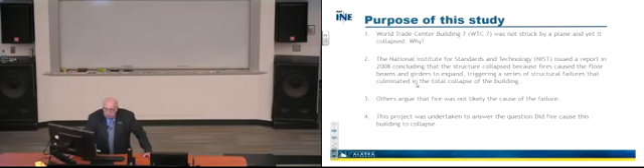More importantly, I want to let you know that since this is a progress report, it's not a traditional slideshow with just bullet points. There's quite a bit of prose here, and the idea is that this will go out and be available for you to read additional information if you would choose to do that. We're going to be transparent. We welcome any questions. We're making everything we've done available, and we want to make sure that everything we've done is scientifically tested. So we'll have a peer review committee to make sure we've met all those standards.

Now the methodology. We assembled first the available documents, construction drawings, etc., that were available for this project, for this building. Traditionally, I would have liked to go in and pick up all the pieces of the puzzle and put it back together like you would a typical airplane, but they did not exist, it wasn't available. So we did the best we could with all the available documents, and basically we created an AutoCAD drawing that we used to create a virtual geometry of this 47-story building. In digital form, you should be able to see every piece, every puzzle, every member, and it should look exactly like what was used in that structure. That's what we did.

We then prepared an ABAQUS nonlinear computer model for the connections and for the framing of this building. That's a fairly sophisticated finite element program available that enables you to look in detail at how something is going to respond under a set of conditions. I know I have a mixed audience here, so I'll try to keep it as simple as I can, while also sharing some pieces of complexity so those in the technical arena appreciate that we looked at this in a fairly sophisticated way. There's several things here I haven't talked about - we have SAP 2000, the current edition, version 18, and ABAQUS, and we used those to look at the framing.

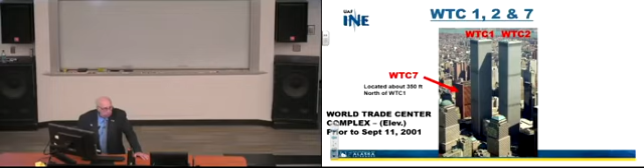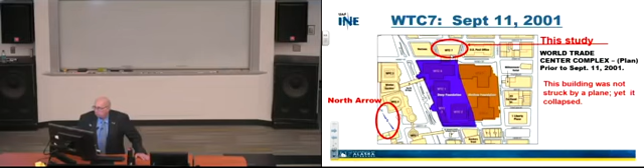Within that context, here's floor 13, because we're going to spend a lot of time there, so you'll understand what's going on in that area. Here are these perimeter trusses I was telling you about, at floor 5, 7, 24, and 22. Those trusses are resisting lateral loads. And in the plan view, you see A, C, D, and so forth.

There's that building in plan view, and here's what we're looking at. Down below is the Con Edison substation, shipping, and so forth — all the things going on down there. That's what it's built on, that's what it looks like, that's what we're dealing with — way more complex than that. That's the perimeter view; that's not what it looks like in the internal view.

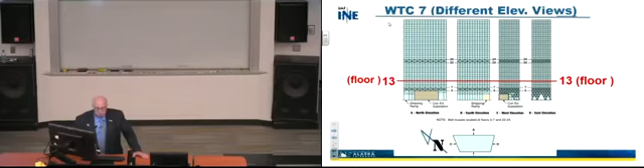Because column 79, just to give you a snapshot of where we're heading — column 79 is basically what they said failed to bring this building down. So we're going to go there and take a look at it, and we're going to look at it intensively.

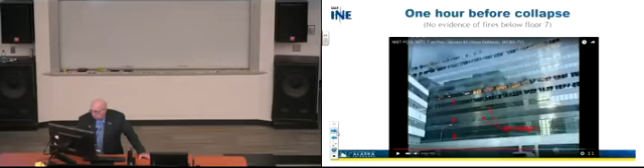The beams didn't get that hot. When we take a look at the beams, they reach 500 degrees C, and the column temperatures only reach 300 degrees C. Now that's significant, because there's a point in time, and I'll show you in a moment, whereby the steel begins to decrease in strength and modulus when it reaches a certain elevated temperature. So the first thing I would have thought when I got involved here is, okay, the columns obviously got really, really hot, lost strength, and we would have ended up losing the building.

Where's that at? Just to give you a heads up on what I'm talking about, that's along this line. Okay? Those are the lines of these beams right here. You see these beams? They're going into these girders. They're framing in. Am I making myself clear? So in plan view, I've got a beam going from this outer edge to that girder. And those are beams. And those are the numbers, 3004 and so forth, that we're talking about. Okay?

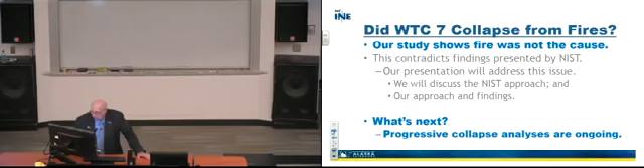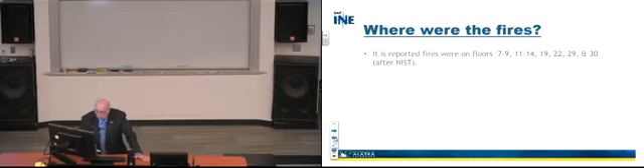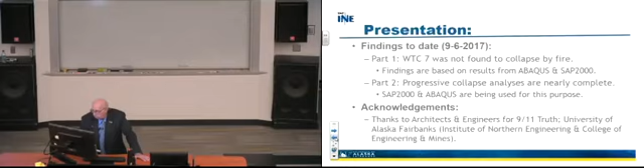The bolts fastening girder A2001 to its seat at column 44 and 79 were broken. That's significant. So let's go back here. Here's 44 and there's 79. And they're saying the connection of this girder to those columns, the seat connection, did not function during that period and therefore lost lateral support and produced a problem. Okay?

Going backwards here or something. Hang on a second. I'm going crazy. Too much fun. All right.

So they've lost those supports. So that means those two columns no longer have lateral support at that level, and did they possibly have a problem later? The floor loading was 88 pounds per square foot. The NIST computer model results were based on exterior columns being fixed in every direction. That's kind of a significant thought.

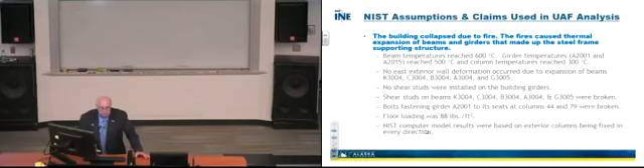All right, so now, looking at their plans, this came out of the NIST report on page 343, 2008. And so this gives you a geometry of, that's a 45-foot length from 44 to 79. 45 foot, that's a girder length. That's longer than this, for sure. You see what I'm saying? That's not small. This is a huge building, 600 feet across. I mean, for God's sake.

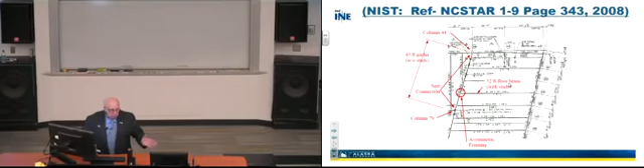So here is 50-some feet here, 54 feet across. This is our exterior wall. I'm in the northeast corner of this building. Is that clear to everybody? Here we are in that trapezoid world. Notice that there's asymmetric framing. These beams, those beams, for God's sake, are 52 feet long. That's not small. I mean, where in the world do you see that kind of stuff?

So anyway, in their view, by taking a heat model, putting fire on it and then subjecting their finite element model to an increase in temperature, they got a thermal expansion. Their thermal expansion looks like this. So that actually is this girder right here, A2001. And it expanded, and they said it pushed off of this bearing seat, and thereby they lost support. And then these cascaded downward, okay?

So that's basically what we're talking about here. There's that girder I'm talking about. There's that exterior. And here are lateral supports for this beam system through here. So what were their conclusions? First of all, fire-induced weakening of critical columns did not cause WTC7 to collapse. Okay, didn't get hot enough. They're saying that 300 degrees is not hot enough.

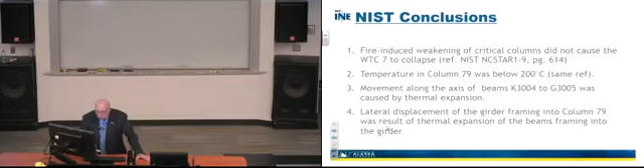No argument. Temperature in column 79 was below 200 degrees C. I think that's true. I might have to look that up as a reference again, but I'm pretty sure that's about what it was. Movement along the axes of beams K3004 to G3005 was caused by thermal expansion. Then the lateral displacement of the girder framing into column 79 was a result of thermal expansion of the beams framing into the girder.

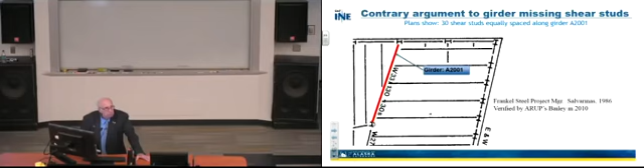All we're saying here is when these heated up, they got longer. This was fixed, so they're all going to move to the left. That means they move what direction? West. And in moving so far west, what happens? Well, they're going to try to move, and is there enough space to hold them in place? That's what their argument is, right? That's key right there. And that's what it looked like. Bang, bang, bang, bang, right? This thing bowed outward. And so this moved and that moved.

Okay. This is the cascade issue that they said. Okay, so the buckling initiated here at this place right here, at floor 9. And then all these issues means that they lost lateral support of that column. This is column 79, by the way, the one we've been focusing on. That column 79 doesn't have any lateral support, and because of that length, it cannot take nearly as much load as it was designed for.

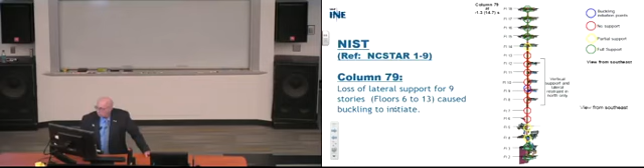And so consequently, the vertical support and lateral restraint in the north only, and so therefore there's a huge problem. And then there's full lateral support up here, and then there's partial lateral support down below. That's down here at the very bottom in the kind of Con Edison area. Those are all laterally supported. But between this zone, they said, went away. So the loss of lateral support for 9 stories, floors 6 to 13, caused buckling to initiate, which means you lost it. Okay? Is that clear? Everybody clear about what I'm saying here?

Okay. Now let's take a look at their model for a moment. Their model is looking at a partial of that trapezoid. Down here, partial. This is the northeast corner. There's column 79. And that blue is kind of significant. That blue is where, at every place a beam and a girder come together, a column to girder, a beam to all these kind of things, there's a connection that's on the drawings that says, here's how you will build it. You bolt it together, you make it do whatever you want it to do, and that's the way it was supposed to be built.

Remember that the north arrow is here, this is the west side, the east side is to my right, and this is after NIST, the area of floor where connections were modeled on floors 8 to 14, and that's in the blue area. Over here, that wasn't done. So, there's column 79, here's the area outside, and so now let's take a look. Outside the selected area, connection failures were not modeled. NIST used fixed or pin connections.

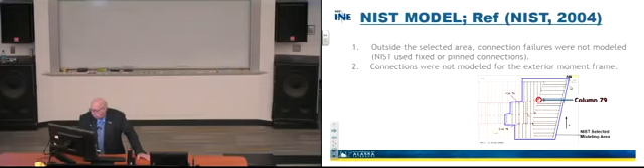So automatically, you have to ask yourself the question, do they have the same stiffness as what you were modeling here more accurately? And so the next corresponding question is, does it have an influence? Does it change how the system is going to respond? And so the connections were not modeled for the exterior frame, and the columns themselves were treated as fixed.

So also in the NIST documentation, page 525, 2008, a girder was considered to have lost vertical support when its web was no longer supported by the bearing seat. That means if there's loss of bearing support on A2001 coming into column 79, then it's lost. The bearing seat at column 79 was 11 inches wide. Thus, when the girder end at column 79 had been pushed laterally at least 5.5 inches, the web was no longer supported by that bearing seat.

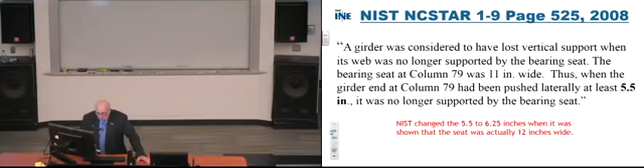NIST changed that 5.5 inches to 6.25 inches when it was shown that the seat was actually 12 inches wide. So that's something to think about. Why did that happen? And that was later. So some of the NIST results are the following. And pardon me, I hope I'm not boring you, but this is a passion for me. But here, let's take a look at what actually happened.

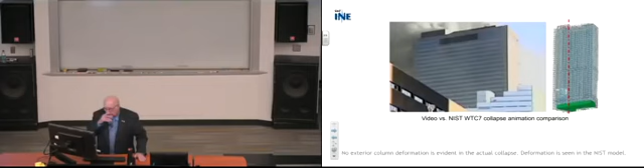Here's the NIST model. And remember those connections. Okay, so we're looking at this not from the south, we're looking at it from the north, right? Isn't that right, Zilly? Or am I looking from the south? Yeah, that's the north face of the building. Yeah, exactly. North face of the building. So here's a penthouse up here, and you're going to see two different situations here because of the connections issue. Now let's see, and this is the real building.

So here's their model. This is their progressive collapse, and I'm not going to show you ours yet. And here is this one, okay? And here is taking a look at the failure that actually did occur that day.

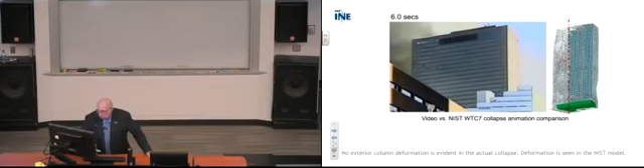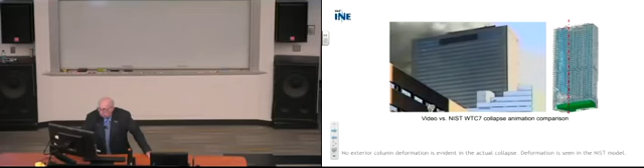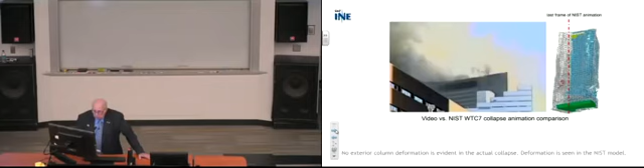So one has to ask themselves, is that the same thing? Is that the same building? So it looks like it behaves in an interesting sort of way. Okay, so anyway, let's go on.

Here's the NIST model that we were just looking at. And so this is the other side, you see, flipped, that I'm showing you where that modeling was actually done. This is column 76, 78. And 79 is in here. And so they were looking at this finite element progressive model that they were using to look at that.

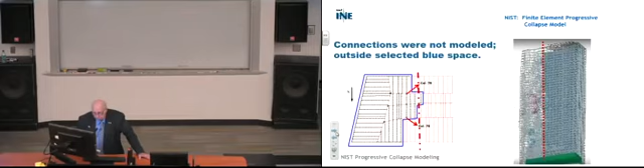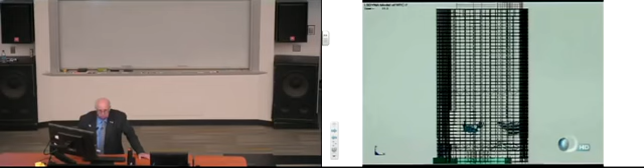Oh, I suppose we could even look at it from a different perspective. And there it is again. This is what they're doing. You have to ask yourself the question, though, why is it so much different on one side than the other? You see what I'm saying? And here's things that, because of some damage that came in from the debris falling through the windows and stuff, they're accounting for some of that stuff.

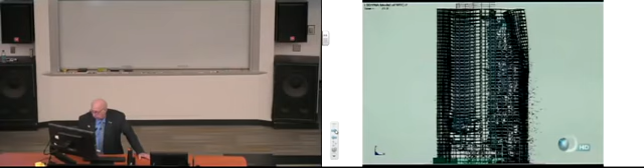Anyway. All right, so let's talk about UAF for a moment. Analysis of the NIST collapse initiation, hypothesis and propagation claims is really what we're about to embark upon: how valid is some of this stuff from a science point of view.

So in the UAF analysis of the NIST collapse initiation, hypothesis and propagation, we created a solid model, in Abaqus, of the structural members in the northeast corner of the 13th floor of WTC 7, and a finite element analysis was then performed to replicate the results claimed in the NIST WTC 7 report that girder A2001 was pushed or rocked off its seats at columns 44 and 79 to initiate the collapse of the building. So one might argue that if those things didn't happen, would the building have collapsed?

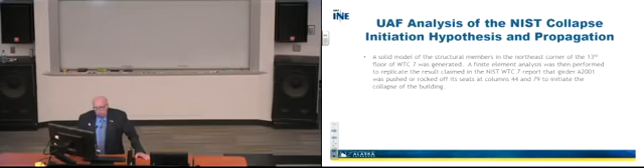So, okay, so here we go. This is the area I'm dealing with, right in here. There's column 79, there's that girder, A2001, there's 44 and 79. And the question then becomes, how does it behave?

So what we're going to do is we're going to create part of a finite element model, and we're going to be really conservative. We're going to force things to happen that's worse than the real world, okay? And in so doing, if we can't force failure, then it couldn't have happened. Are you with me on this point? All right, so that being said, we're going to fix the ends.

We're going to force movement through girder A2001 by heating it up. This over here is going to be heated up. These beams are going to get heated up, and they're going to be fixed in the other direction. So we're pushing it each direction, making matters really, really the worst possible.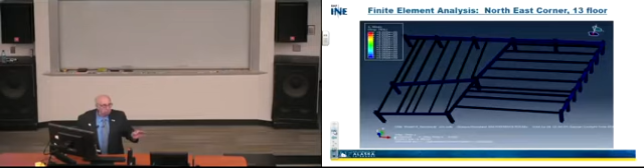Okay? We did that. And so this is the beginning. You'll notice everything's zero. The stresses are all zero. We haven't put the temperature on it yet. Okay? This is the column that we're talking about, column 79. This is real significant, by the way, because column 79, if you look at it, do you know what I'm talking about when I say a W shape? A W shape looks like an H. And that's what we're looking at right here. That's what that column was made out of.

It's a W14 by 730 standard structural shape. What that means is it's 14 inches deep, weighs 730 pounds a lineal foot. That's a chunk of change. Now within that context, though, what they did is they built side plates on it. And they closed that box. They closed it so it has structural integrity, so resisting twist, significant.

But those edges, those 2 inches by 26 inches buildup, means that there is a lip on each side of this, and they're going to literally put on that flange the bearing plate. Okay, are you following me? That column stays vertical, but we're going to put a bearing plate in here. Okay, so there's what it starts to look like. We're looking at it right now.

Plan view, A2001, going over to 44, and there's a connection to column 79. And see that lip right here? Those lips? Okay, got it? Understand? So if this thing starts moving, and it's getting shoved, and if it's getting shoved to the west, which is to my left, it's probably your left too, then it can't get past that thing, unless something happens or breaks, right? Does that make sense?

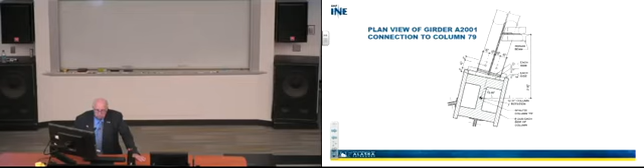And there it gets shoved. So the plan view of A2001 moving across its bearing seat at column 79 due to thermal expansion of the beams framing into the girder from the east is here, and it gets shoved. Note that picture illustrates that A2001 is trapped by that column side plate, and it's not possible for it to move the girder web beyond the seat claimed by NIST.

They're saying it got shoved off and fell down. The fact of the matter is they didn't have the side plates on it. They weren't there in their model. So they wouldn't have found that. But yet they did exist in the structure, in reality. It appears that NIST did not examine the side plate influence on the restriction of movement by that girder.

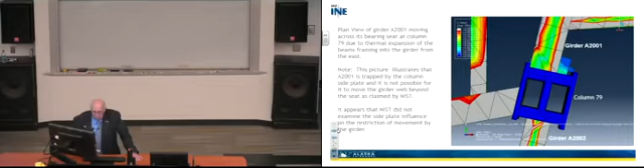Okay, so now let's take a look at what else we looked at. And this is just part of the puzzle, because we've been playing this game for 2 years. So this is just a few weeks of stuff. So the model shows the influence of the thermal expansion at the northeast corner of floor 13. Here we are. There's column 79, column 44, and there's the northeast corner. And here are the beams framing in to that girder system.

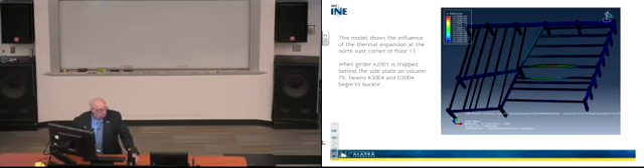So when girder A2001 is trapped behind the side plate on column 79, these beams begin to buckle. In other words, they can't go anywhere. So it's heating up, it's pushing, and they can't stand the amount of load axially that's been imposed upon them. And so they begin to try to displace out of the way and relieve their states of stress. Are you following what I'm saying here?

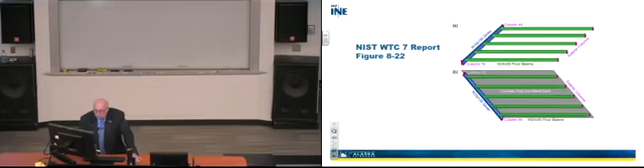So fundamentally, that happens. So this is out of the NIST WTC 7 report, figure 8-22, which is showing basically concrete slab, metal deck, all that kind of stuff. Exterior columns out here, and this is basically column 79, column 44, and how that column is, and the girder here, and so forth, okay? And here's what begins to happen on the exterior columns according to their stuff, okay? And so they did not have those side plates in there.

So let's treat for a moment the lateral support beams, S3007, and so here we are in this area right here. See those little beams in here? They play a role, and that means that they provide lateral support for that beam, also for that exterior. So they're forcing them to act together, not individually. So if things actually got out of hand, you have a lot more capability from a lateral torsional buckling point of view or an axial load point of view.

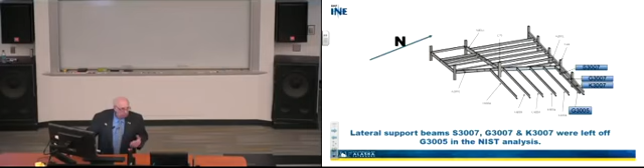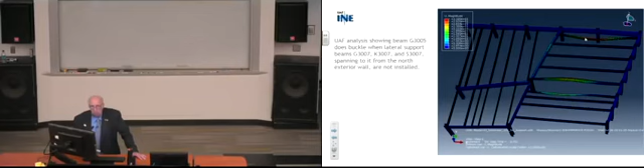And so the lateral supports were left off in G3005, okay, of this beam. Those were left off. Yet they're there. So that means that something could happen, and there it is. So UAF analysis showing beam G3005 does buckle when lateral support beams 3007 spanning to it from the north exterior wall are not installed. Okay? So if those are not installed, it's going to buckle. So the UAF analysis also shows that that girder does not buckle when you have them in.

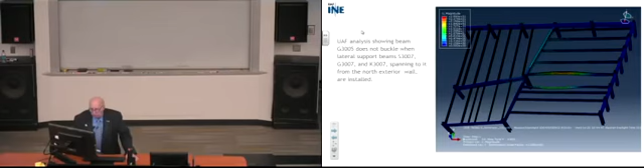There's a huge difference between those two thoughts and what that might mean to the behavior of this system, spanning to it from the north exterior wall as we see here, okay? So as everybody is getting a mental picture of this building, you should be almost getting an intimate view of what we've been living with in this picture, okay? Let's take a moment, take a breath of air.

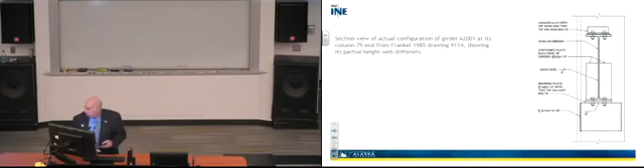Section view of actual configuration of girder A2001 at column 79 from the Frankel 1985 drawing 9114 showing there's partial height stiffeners in here. Now, folks, let me just absolutely tell you, this is critical. Those stiffeners prevent this web from buckling. But more than that, it prevents these flanges from getting overstressed and flexurally having a problem. If they're there. But NIST did not include them.

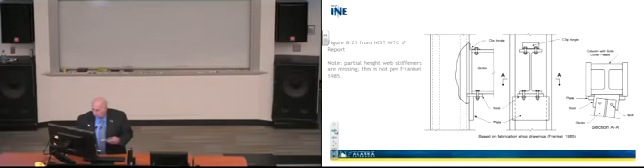So, partial height webs are missing. That means there's some issues here that literally affect the behavior of this system. So figure 8-23, finite element analysis from the NIST WTC 7 report, note partial web stiffeners are missing. So the behavior of this interaction between column 79, A2001, column 44, the beams to the girder, the moving of the girder on that bearing stiffener, I mean on the base plate.

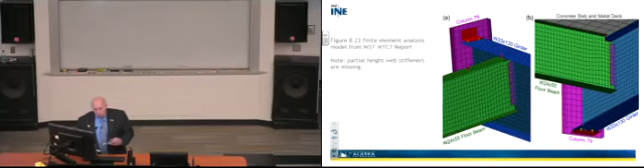Now remember, they didn't have the base. They didn't have the side plates. They didn't have the stiffeners, and all of those things are going to give you a huge added resistance to anything going on here. And in spite of the fact, I'm going to share with you some other things that make it quite interesting. So here we go. There's what if you don't have any side plates.

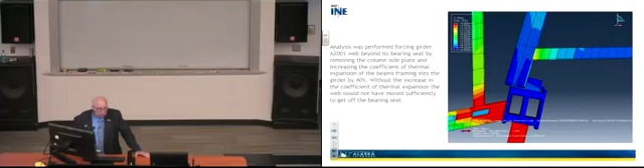So the analysis was performed forcing girder A2001 beyond its bearing seat by removing the column side plate, increasing the coefficient of thermal expansion of the beams framing into it by 40%, so we could get that kind of movement. That's not true; we did it just to see what could happen. Without the increase in the coefficient of thermal expansion, the web would not have moved sufficiently to get it off the bearing seat. We wanted to see if we could make it move. Okay? That's what we did. That's at column 79. That's A2001. Is that clear? Everybody got a mental picture of what's happening?

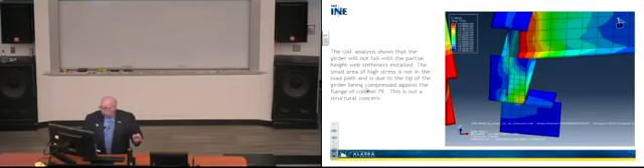Well, again, the UAF analysis shows that the girder will not fail with the partial height web stiffeners installed. That small area of high stress, right here, right there, is not in the load path. That's a point of high stress, by the way. It is not in the load path, and it's due to the tip of the girder being compressed against the flange of column 79. This is not a structural concern. It's a fact that there was some overstress there. It's not going to cause the building to come down.

So we also conducted a modal analysis showing the 52 Hz frequency mode of the falling beam and girder assembly, which was needed to calculate the combined stiffness of the contacting structural members and the subsequent impact load on the girder below the 12th floor. So here we are on the 13th. It falls, drops off of that base plate, drops down, beams go, girders go, concrete goes, all that stuff happens. You're going to have stiffness involved. You're going to have F equals MA involved. You're going to have those conditions, and so we looked at that.

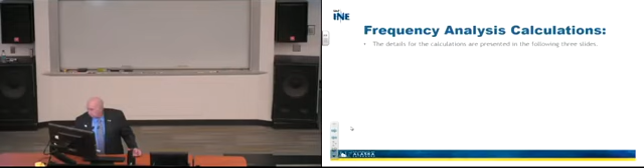The NIST and Arup claimed that the falling beam and girder assembly from floor 13 impacted and broke through floor 12 in an 8-floor cascade. Okay, so based on the natural frequency, the stiffness of the beams can be calculated and the amount of deflection under load can be examined. This establishes whether the phenomena could actually physically occur. I'm not going to spend any time on it, but those calculations are in the following pages, okay? So we did that to examine that issue, and that's where they are. At night while you're relaxing, you can read these. But I'm not going to read them for you.

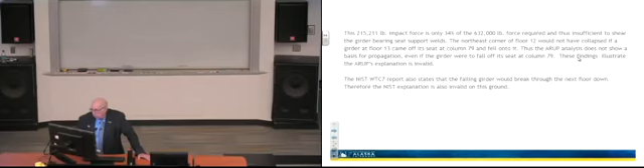So anyway, this 215,211 pound impact force is only 34% of the 632,000 force required, and thus insufficient to shear the girder bearing seat welds, and the northeast corner floor 12 would not have collapsed if a girder at floor 13 came off its seat. That's basically what we're saying. Thus, the ARUP analysis did not show a basis for propagation, even if the girder were to fall off its seat at column 79. These findings illustrate the ARUP's explanation is actually invalid. That's another group, by the way. So there's more than one group involved. Weidlinger Associates' report information is going to be presented following this, and so here that is, if you want to read it.

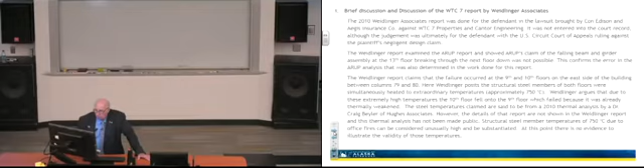And I originally had a change to this, and it looks like that change didn't get made, but I broke this out. So anyway, let's talk now about our approach, which is looking at things from a different perspective. There was a 5.5-inch movement at the girder bearing support at column 79 according to NIST. The issue that led to that 5.5-inch movement was non-composite main girders. Now, what do I mean by that? You have concrete floor slabs, and you have to decide how you're going to build it. Are you going to build it with shear connectors to the flanges and make it act as a system, or are you going to leave them so that they can slide? So I looked at it both ways. I said, okay, what if it slides? What if it's so lubricated between those flanges and that concrete, there's no resistance to movement?

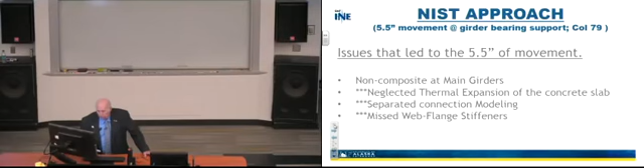What if there's friction between it? We looked at that. What if it's partially composite? What if it's totally composite? So for all those, we neglected thermal expansion of the concrete slab, separated the connection modeling, and missed web flange stiffeners were looked at. Okay, so all those issues are going on there.

So our approach was to take structural modeling and look at two programs, Abaqus and SAP 2000. We established a quality control program with two researchers, Zili and Fong, each doing the same thing much of the time and challenging each other, with me there as a referee to make sure what we got out of it was right. If we didn't agree, we had dialogue to find ways to figure out what's going on, what's wrong, until scientifically we could justify every step of the way. It takes longer, but it's valuable to make sure you have good stuff.

So in Abaqus, we developed nonlinear springs for structural connections. What does that mean? It means that if you have these members bolted together and things move, and it moves fairly significantly, then it's probably not a linear curve. It's probably not a straight line. It's probably going to deform non-linearly, and it may never come back the way it used to be. So we looked at a nonlinear response.

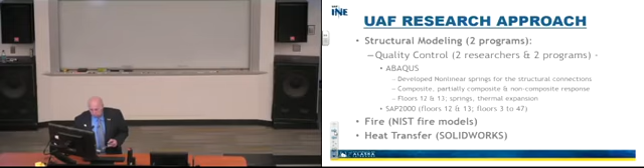We looked at composite, partial composite, and non-composite conditions. We looked at floors 12 and 13, and we looked at thermal expansion. In SAP 2000, we looked at floors 12 and 13 again, and floors 3 to 47. Here's what we did do though: we used the NIST fire models for this, and then we looked at heat transfer using SolidWorks, and we also used Abaqus to do that. The steel framing, connection columns, beams and girders were considered throughout the entire floor, not just part of it, by the way - all of it.

So nonlinear springs on all stories is something we haven't finished yet, but we've looked at it. Substructuring frames and concrete floors were used to minimize computer time. It's my understanding that some of these computer models were taking weeks to run. I went to a substructuring system where we could run them in less than an hour, maybe half an hour, maybe even less than that - I'm not sure. They ran really fast because I took out all the complexities and replaced them with equivalences. And then if we wanted to know what was going on within those equivalences, we put that stuff back in. So we could save huge amounts of computer time.

Heat transfer was studied, and we looked at the floor tile over the concrete with welded wire fabric, stay-in-place forms, and flutes. These were stay-in-place forms, and there's a flute - what does that mean? It means there's a steel... imagine if you take just a straight line and you drop it, a little square hole, you'd say, and it's long. And so that space is a place where they don't put any concrete. It's an open space - saves concrete, you still get strength, and that's the flute.

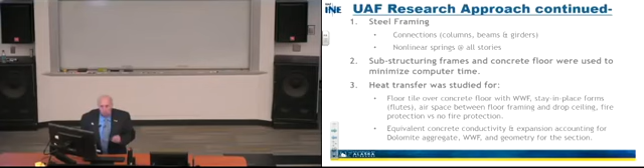We looked at equivalent concrete conductivity and expansion, accounting for dolomite aggregate, welded wire fabric, and the geometry of the section. What am I talking about there? Well, we went back to New York and asked what kind of aggregate they used when they built this. We tried to be sure we knew the aggregate, because it has a huge effect on the thermal conductivity and thermal expansion of the concrete. It's 75% of the product, so we needed to know what it was going to be. I had written a paper on this subject some years before and had a pretty good understanding of that.

So this again is the NIST seat connection at column 79 that they did, but they didn't consider those stiffeners. So here's the way we began to model the actual system, the way it went together. Here are those side plates - notice that they're there. Here's the girder coming in, and there are the partial height stiffeners. So therein lies - they actually were there - and we began to model this from a computer program into digital form, so we knew how this thing was going to behave when you put it together.

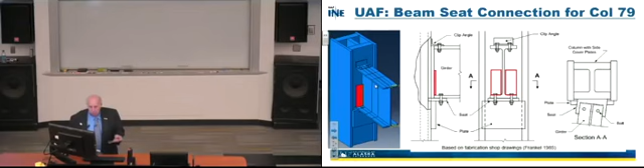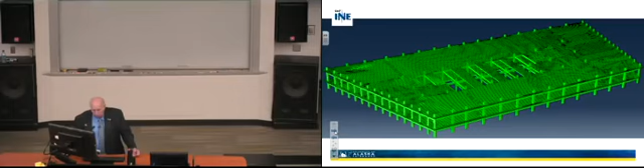Here's what that floor system actually looks like. By the way, these are elevator shafts. This over here is column 79, and there's column 44. There's the exterior of that floor, there's the whole system. That's an Abaqus model we're looking at.

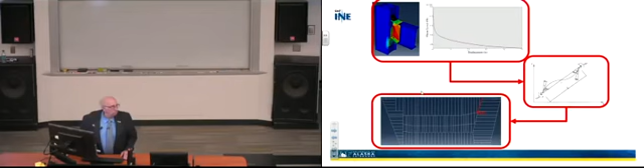UAF sample connection response. I'm taking every one of these connectors, and we identified this and called it an STC. That's our name, STC. What does it look like? It looks like this, that's the connection type. We plotted the shear load versus displacement on it, so we can always go in, put that spring wherever it's at, and get a response equivalent to if we had used all that complication anyway. So we threw it away, and replaced it with an equivalent to save time.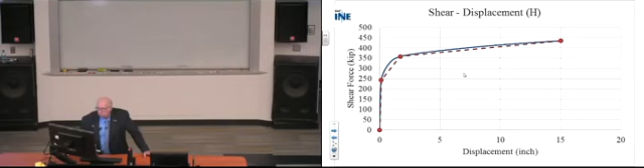Basically, we put a load, we plot its behavior, and from that we can then put the equivalent into it. So this is a simple model of floors 3 to 47 from SAP 2000, and that's what we're using to look at progressive collapses with.

Let's take a quick look at the materials that went into this thing, I won't bore you too much, just a little bit. Material properties: steel ASTM A572 had a yield of 50,000 psi. Thermal conductivity of the steel was 35 BTUs per hour per degree Fahrenheit. Here's the thermal strain value. Density was about 490 pounds per cubic foot. We also had some ASTM 36 steels in here, I'm just not showing you all of it.

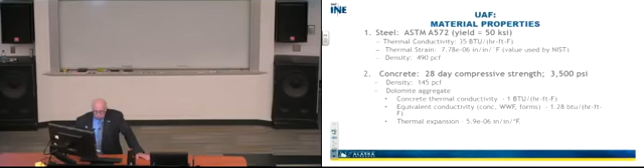Concrete's 28-day compressive strength was 3,500 psi. Density was about 145 pounds per cubic foot, dolomite aggregate. We got a thermal conductivity from it, and an equivalent conductivity we're going to be using here, and thermal expansion. So that's the kind of stuff that made up the model to simulate what we thought the building was going to be.

We took and fixed the exterior column wall line here, as did NIST, and we subjected it to that heat-up model, and we got a very similar result. Well, we didn't actually—we did. This is not, I'm sorry, I apologize, this is not the NIST model. This is our model. Here we have the connections as they truly are, all along this system, throughout this entire floor system, how it actually was built.

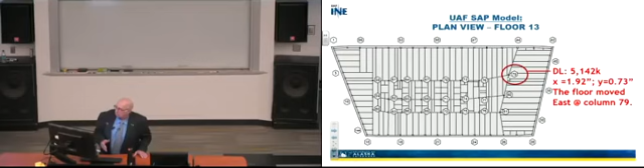Then we heat it up. By heating it up, we have a dead load here of about 5,142 kips. We have a movement of that section right there of almost 2 inches, but not west—it went east. Totally different. The floor moved east at column 79, not west. And by the way, they moved together, they didn't move separately.

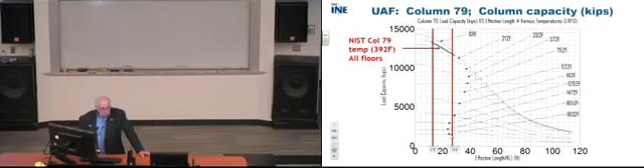So here's the material response versus temperature. Here's the column 79 capacity curve as a function of temperature. You can see even if you drop down into here, you don't get much change—column 79 at 392 degrees Fahrenheit. This is load capacity versus the effective length for these various temperatures. So this is 1832 degrees Fahrenheit. I think you can see it can make a huge difference, how much the capacity of that thing changes.

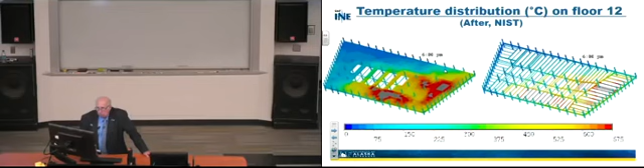Let's talk about the fires we actually put in this building, here's what they were on floor 12. There's that whole area at 6 p.m., and then there's the fire. That came from the NIST models, and we used them at this point. Same here on column 79, floor 12 and 13. UAF Abaqus structural expansive movements, just wanted to share with you. This is the model we're talking about, this is floor 13.

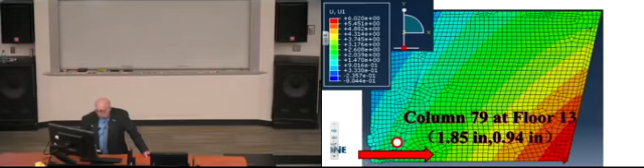This is column 79 at floor 13, 1.85 inches to the right. That means east, not west. So this whole thing moved. I'll show you a different picture here in a moment. So this is all this stuff to the east of this.

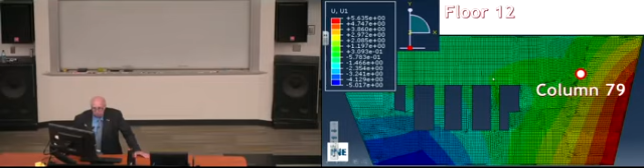You can begin to see the displacements if you start looking at minus 0.50 - where's the zero at? It's over here somewhere. Here's column 79, so it's moving with respect to this area over here. It's not moving with respect to this, it's not moving with respect to that. It's moving this way and that way with respect to what we call the thermal centroid, which is your stiffer point. So basically you've got a center of stiffness by which this thing is behaving. And that's what's happening here.

Notice that our results in the SAP model, column 79, shows 1.92 inches to the right. This is SAP, 1.85 in Abaqus. We did it two different ways and got very close to the same answers. And then NIST is 5.5 inches to the left, revised to 6.2 inches. Why? Because of some of the things I was telling you, in my view.

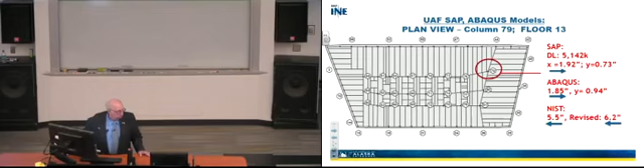So let's do a little comparative game. Floor framing, steel connections - we accounted for them, NIST partially. We have exterior steel framing connections included with springs; they did not. I'm talking about the exterior walls - they had them fixed, remember? Floor is composite with beams and girders - girder to column stiffener plates at column 79.

What about the floor composite with beams and not girders? Both of us considered that. Composite with beams and girders - yes, but they did not. Thermal expansion of the concrete deck - yes, but they did not. Thermal conductivity and expansion of material properties.

So what I did is I went back and got the aggregate, then I changed it to make sure we knew what the thermal conductivity of the concrete would be and the thermal expansion of that material if they actually made the concrete matched to the aggregate type. We accounted for that, they did not.

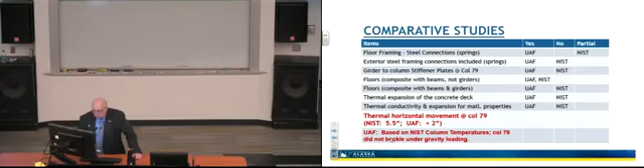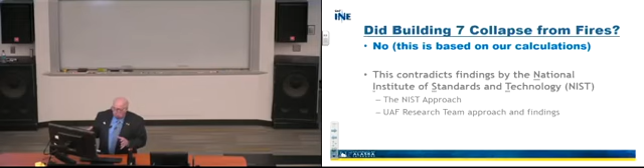Thermal horizontal movement at column 79 was less than 2 inches. Therefore, based on our analysis, column 79 temperatures were such that it did not buckle under any gravity loading. Couldn't have happened. So did the Building 7 collapse from fires? No, this is based on our calcs. This contradicts the findings by the National Institute of Standards and Technology, the NIST approach. So that was what I view to be the real way it actually behaved - not what you assume, not what you do in terms of boundary conditions, making things perhaps easier for yourself or whatever.

So the concrete floor diaphragm stiffness is significant even with no shear connectors. Frictional resistance to thermal expansion is not trivial. We noticed that if you take out those shear connectors, they argue that they're not there - take them out, I don't care. When they go away, I have enough friction and enough shear connectors on the beams that it doesn't matter. It's not going to make a difference. So that's what we determined, and we looked at it both ways.

The thermal expansion of the concrete deck cannot be ignored, and it's likely less than the steel. The value is highly dependent on the type of aggregate. My research shows that thermal expansion of concrete can be as low as 2 times all the way to 12, whereas steel is about 6.5, depending on the aggregate. We had dolomite aggregate, so we matched to whatever we had there.

The research team evaluated fire by considering airspace below the beams, in the space between the drop ceiling and the structural steel framing. We did that because a number of people felt it was important. The result is that the fire underneath will likely burn through the drop ceiling quickly, and its resistance to heat transfer is likely not available to help.

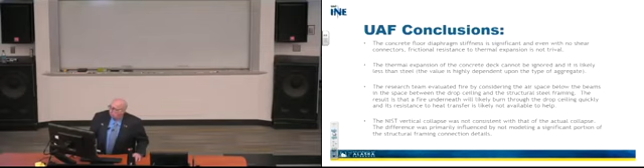So the NIST vertical collapse was not consistent with that of the actual. The difference was primarily influenced by not modeling a significant portion of the structural framing connection details. There may be other issues, but certainly that had an effect - there's no doubt about that.

What's new? What's next? Well, we welcome your input, we welcome input from the world. We would want to be able to make sure that our findings are based on scientific fact, and if there's a question, we're there to try to answer that and make sure that our results are true and of value.

We're providing the study to be peer reviewed. We are examining progressive collapse caused by various conditions, such as failure at the substation level, shock waves imposed by the falling debris from towers 1 and 2. What about the radiant heat that actually was imposed on that building structure by towers 1 and 2 when they heated up under the planes?

I'm interested in examining the building response for various columns being removed. We've already removed the inner core. I'm not sharing that with you, but it's very impressive what's going on. So then the question is what else is going on? And we're examining issues related to the perimeter trusses. There's been a lot of questions about what if they had a problem? What would that mean to this structure?

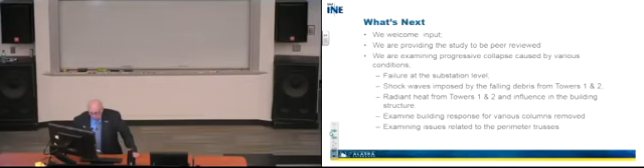I think, folks, that I'm done. Thank you. We'll take some questions.

Yes, please. You mentioned that NIST didn't model, for instance, the partial stiffeners and some of the shear connectors. Was there reasoning? Did they not find that in the wreckage and they don't think it was actually on the building? Or did they do that to make it easier to do the modeling?

I don't know the answer to that. I think it was an oversight. You know, I don't know how they got to that level, but I think it was an oversight. I'm not here to criticize, I'm simply here to make sure that we did it the way the building was built. Try to answer that question as best we can.

Yeah. For the people online, I should probably give you the microphone.

Yeah, I guess I'm still a little bit unsure. When you said NIST revised their figure, they added an additional 3/4 of an inch or so expansion. Maybe I missed it, but what exactly did they cite for revising that figure? What was the variable they introduced that said, oh, hey, we were wrong, there was an extra 3/4 of expansion? I'm not sure I know the answer to that either.